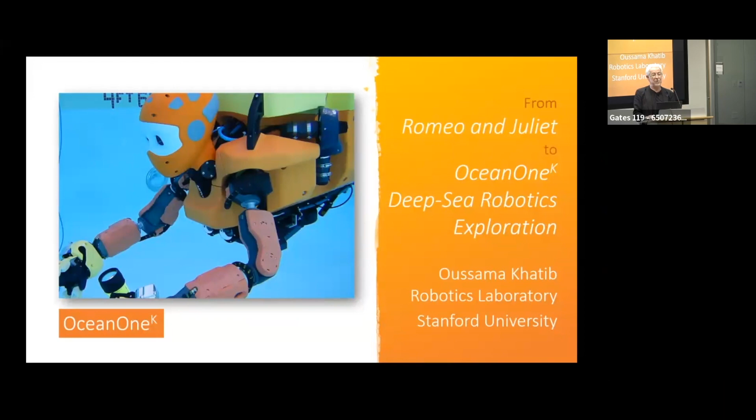But Ocean One is one of the few robots that is going to work in those extreme environments, connecting humans - those of you who have touched virtual environments. We are going to work with a robot, and when this robot touches the seabed, you are going to feel what the robot is doing. You're going to be able to help this robot. And this is what we've been doing. Last year, we ended a mission last July, and that mission was to take the robot slowly from 40 meters all the way to the bottom of the sea, where we can still operate the robot to perform tasks that require hands, require sensing, and require retrieving artifacts.

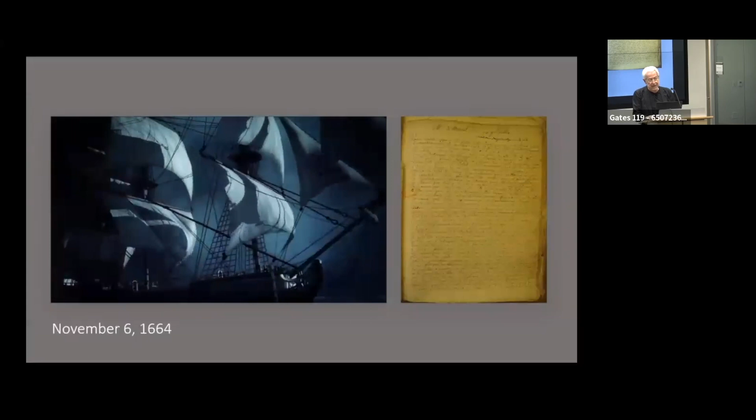So this robot comes following the original Ocean One. Ocean One was designed and deployed in 2016 to retrieve artifacts from La Lune. La Lune is a vessel of King Louis XIV that sunk off the coast of France in 1664. It is at 91 meters, but it's very difficult to reach because humans are only able to go to 50 or 60 meters. To reach this wreck, they use suits. And any normal interaction for an archaeologist with that environment is very difficult, because you need to touch, feel, and interact before removing any object.

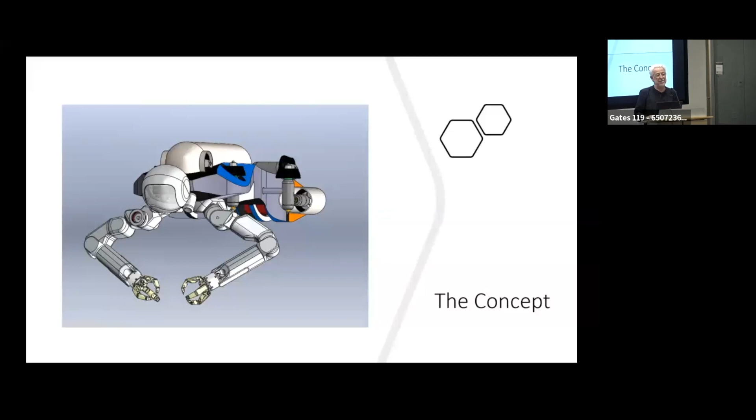So the concept of Ocean One is to create hands with sensors, and these hands are going to require arms. Now think about the problem of taking hands and arms and electronics deep in the sea. The robot has to float, and this robot was conceived with design of flotations.

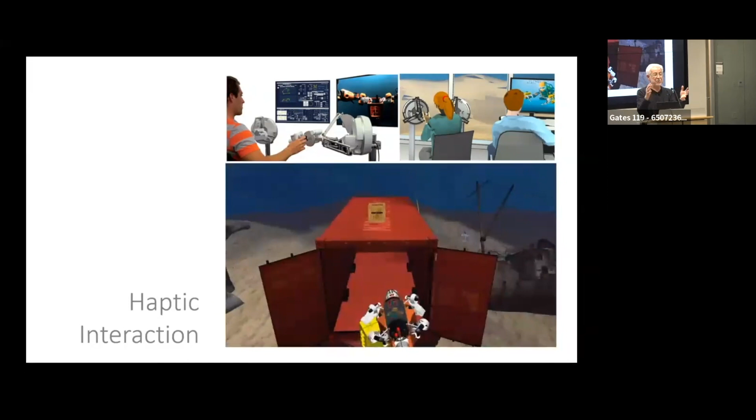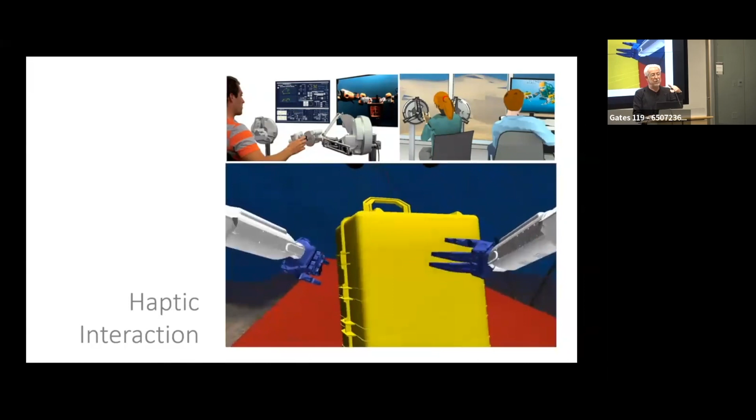For the arms, we don't want an arm that is heavy. We would like to have a gentle arm, we call it a compliant arm. So we have to come up with a solution for the pressure. You don't want to use heavy metal to protect the arm, so we created an oil-filled architecture to build the links, and through tubing we go from one link to the other so that we can have a compliant, touch-sensitive arm.

Some of you have tried this. This is one of the most popular demos where you wear your glasses, you see in stereo, and you are able to touch the simulation. The simulation is very important for developing any complex system, and this was one of the tools we used in our work. This is not an animation, this is a physical simulation with dynamics. You can see this ellipsoid changing as the robot dynamics changes as you extend the hand and move the hand.

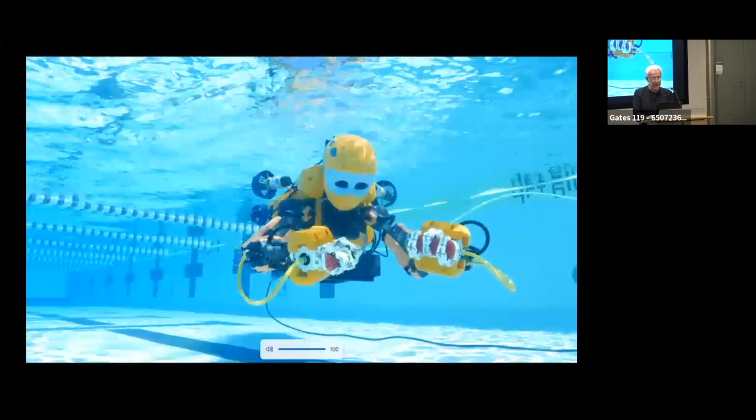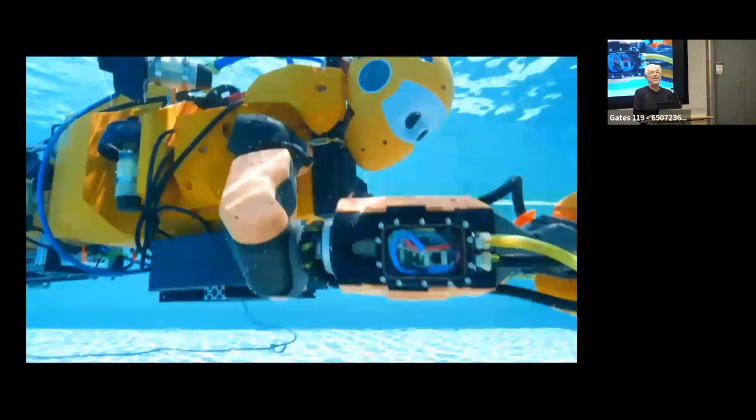Finally, this robot needed to be tested, so we took the robot to the pool. You can see the robot in the pool moving here. I'm not sure if the sound is coming out, so just maybe we can make sure we have sound from the video. Students will be sitting by the pool watching the robot or swimming with the robot. It was a lot of times taking this robot all the way to the pool and testing it, and finally the robot was ready.

We shipped it to France and were deploying the robot on the site. The robot was tested at 15 meters first, interacting with humans.

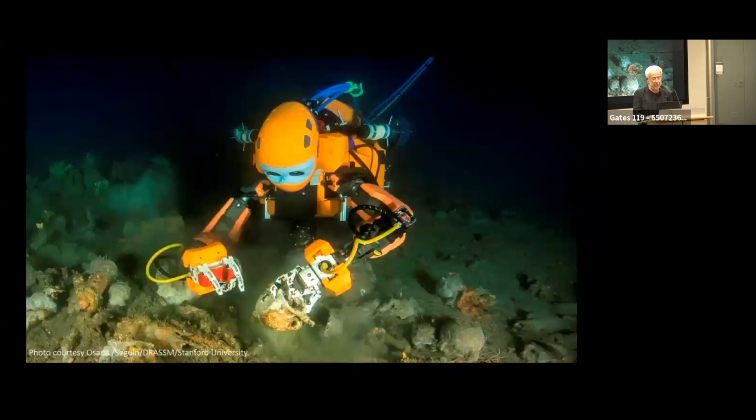So what you do is you place your artifact in a container that floats on its own, and you can see my students so happy. We recover a vase, a Catalan vase from 1664, untouched by a human, and unbroken. The archaeologists were really amazed. They said, this is amazing, a beautiful vase, you didn't scratch it, how? This is because we have dexterous hands, and the touch is so gentle that you are not smashing the artifact that you are collecting.

The year after, we took the robot to another nice place, Santorini. This is a tip to the students: make sure your robot goes to nice places, and then just follow the robot. We were working there with scientists, supporting their work. It was not about the depth, it was more about how the robot can interact and work with humans.

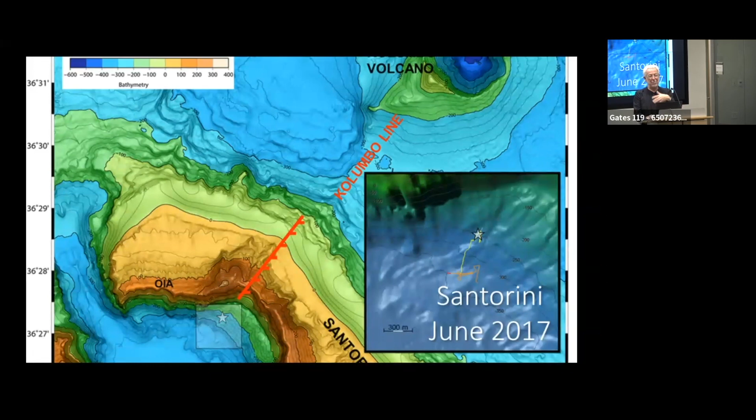We don't have too much time to talk about every expedition. I'm going to move to the question: what is the relation between Romeo and Juliet and Ocean 1K? Well, it wasn't like one day we woke up in the morning and said, okay, let's build a robot to go underwater. It was a long, long process that took us to come up with this idea and come up with the capabilities to handle pressure underwater.

In this place, actually from here, the camera is over there. You are seeing the inauguration of the Gates building. This was Bill Gates with Melinda Gates, and my students were demonstrating this robot over there. This is the Romeo. Juliet actually is at the museum now in Munich, so Romeo is alone in the lab.

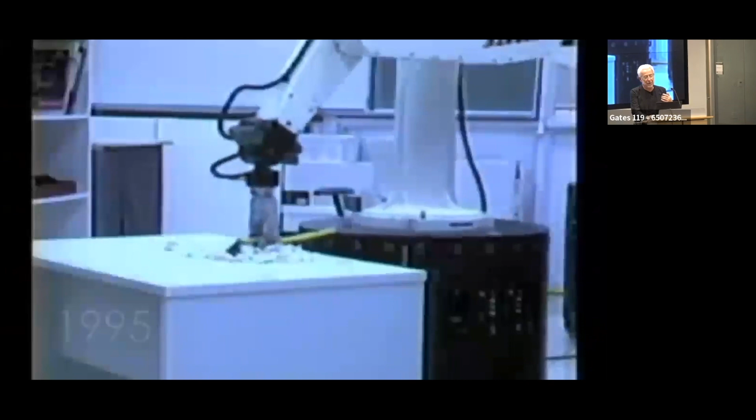This was amazing because when you think about it, it's 1995. In 1995, we were able to iron, vacuum, we were able to get robots to cooperate.

And with a very fragile case, I mean, this is amazing. Even dancing with the robot. So I will show you more a little later, but robotics has evolved so much since.

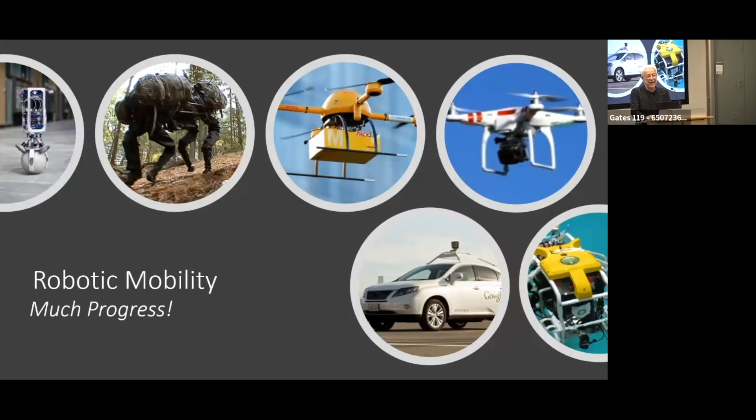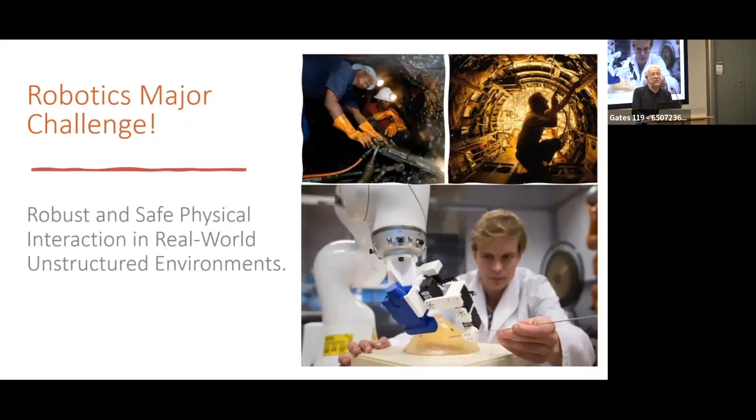And today we have so much progress in robotics. And this progress is quite amazing, especially when we think about mobility. I mean, in mobility, we see robots on land, in the air, underwater. The challenge that we have today in robotics is, can we do the same progress with physical interaction? That is, with robots that are able to interact with the physical world and not only see and move in the free space. So just think about a task like this, cleaning solar panels.

This is very difficult because you cannot anymore pre-program the robot as we did before, inspired by the assembly line. With the assembly line, we automated the process where we design fixtures and jigs and make sure that everything is capable of going over and over pre-programmed. Well, now we are talking about robotics in the real world, unstructured environment. And if we cannot program these robots, how are these robots going to be deployed and operate in real time?

Well, humans do it. And humans are very different from the robots we use in manufacturing. In manufacturing, we use very heavy, bulky robots because we wanted precision. Humans are not precise. So the only way we can do that is if we come to an abstraction of the way we program robots, if we can bring human skills to these robots and ask the robots to perform high-level tasks.

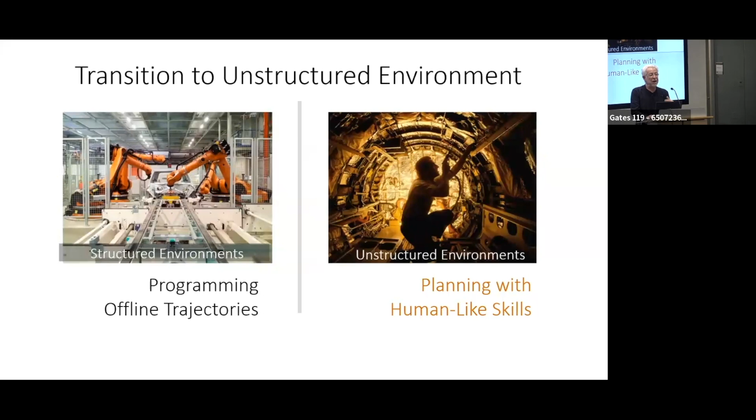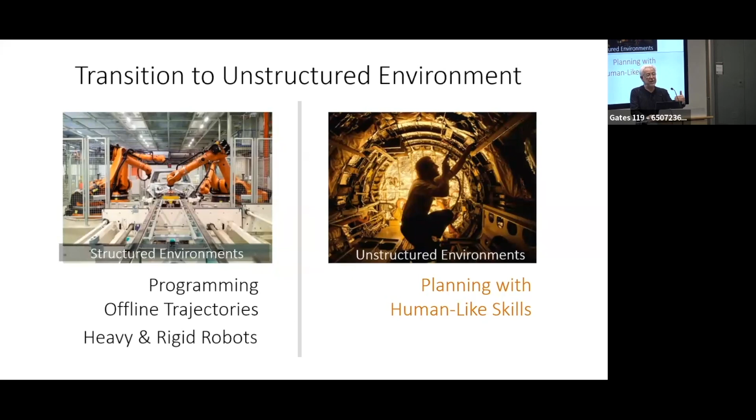We don't need heavy and rigid robots, but we need what humans use, which is touch. We compensate for our inability to be precise with our touch and feeling the way to the task. So this is the compliant robot, and you can see here an example of a compliant robot. There is no trajectory. The robot is feeling the contact. The reaction forces are guiding the robot in the proper direction to achieve face-to-face between two objects.

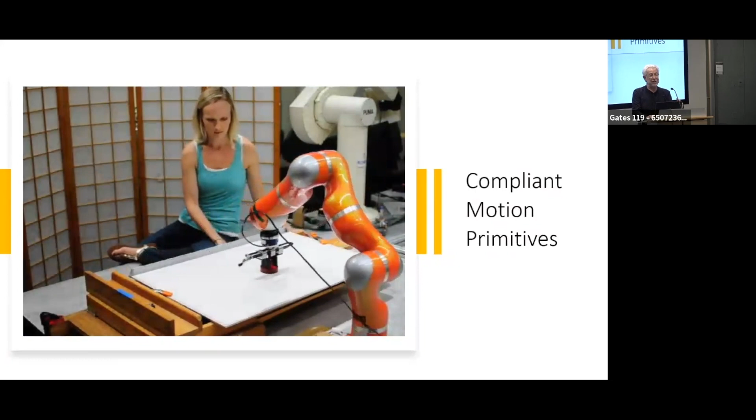This works also in dynamics. The environment can be moving, and the environment is going to change the direction of the reaction force, and the robot continues to implement a strategy to achieve this goal. So this is something very important, human skills, understanding human skills and trying to build manipulation skills.

And the human is an amazing model for us to learn from. But the way we try to learn is really a model that is relying on understanding what is going on, not just going and recording trajectory and trying to interpolate between these trajectories. What we would like to see is what was going on in terms of the strategy, the human strategy. So objects can be defined with a frame.

And if we take the data after segmentation and project it on those frames, we can understand what was the compliant frame, and we can describe what the strategy was for this task, and encode the strategy to the robot, and then implement it on the robot.

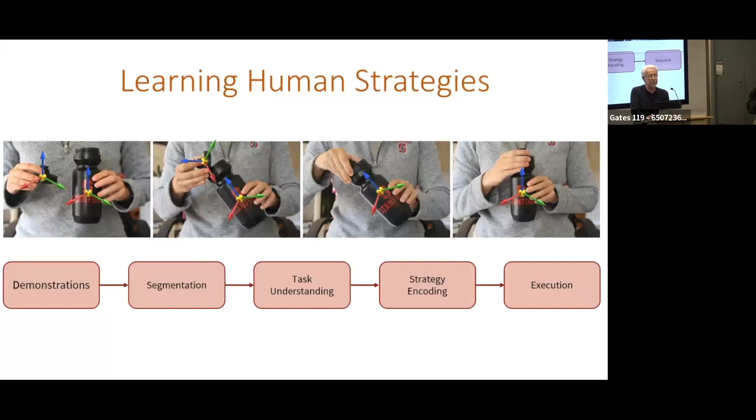So here is an example. The same haptic device is controlling a robot to perform this task. And as the robot is learning the task, now the robot can reproduce the task with the strategy.

This is implemented in many different ways. This is a model of the 787 wing, and you are placing this piece at this location through a strategy involving compliant motion. You disturb the robot, and the robot will find its way autonomously, because it is relying not on the trajectories, but on the strategy of compliance.

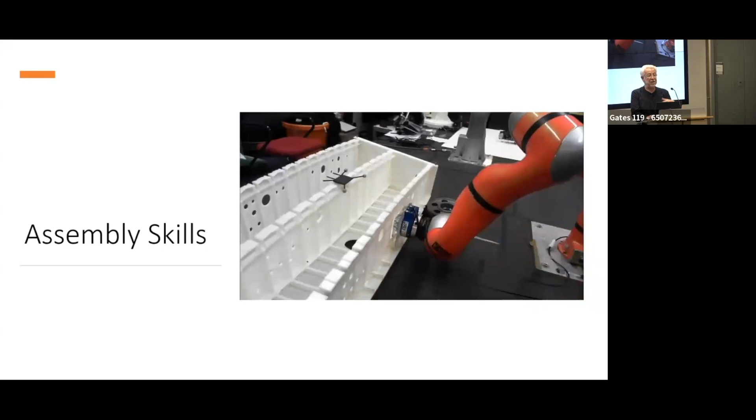You can teach robots to do all kinds of tasks, including the fact that you also need to teach robots how to use two hands. In manufacturing, we use one hand because we have fixtures. If you place your arm behind your back and try to move it and work in the real world, it's very difficult.

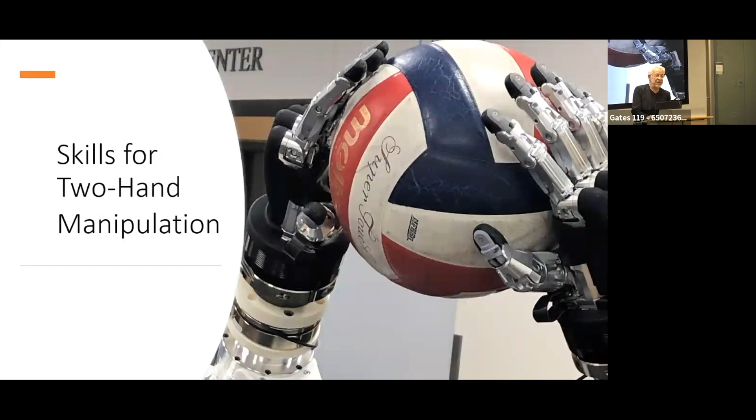So the other thing about those architectures that we use, these are not only relying on one loop feedback between perception and action. We need to deal with the frequency requirement of the system. Mechanical systems require high bandwidth feedback, and that is, the lowest level should be controlled at very high frequency.

But we don't need the same frequency to understand the features of the objects we're working with. The input to that level is going to be much slower. And as we move up in that hierarchy, we are going to have a multi-layer system that is answering the requirement in frequency to achieve functional autonomy.

We still don't have the cognitive autonomy, and we are going to rely on the interface so that we bring to the human an interface where the human can talk with the robot through speech or through haptic interaction or through programming to perform a task.

A very important tool, as I mentioned earlier, is physical simulation. We saw how we can simulate a complex robot. This physical simulation is very important also because it requires us to think about the contact.

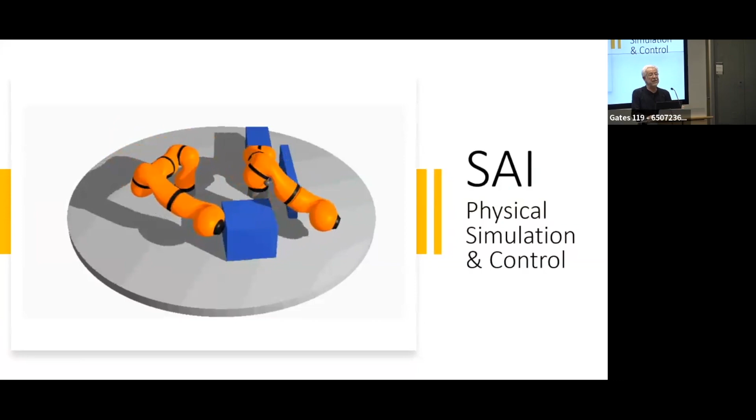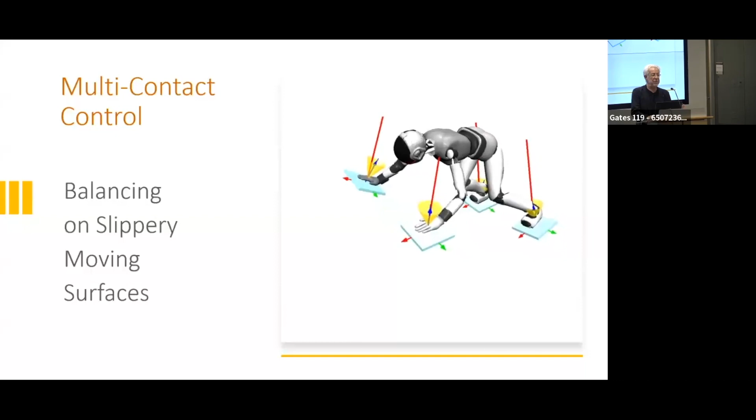Simulating contact is very difficult. Simulating multi-contact is even more difficult. You see these reaction forces, the red flashes that are coming out from the contact. If any of them would go outside of the cone of friction that you see, we're going to fall. That means the robot has to apply different forces as the environment is changing, and this is possible if we bring these physical models to the system.

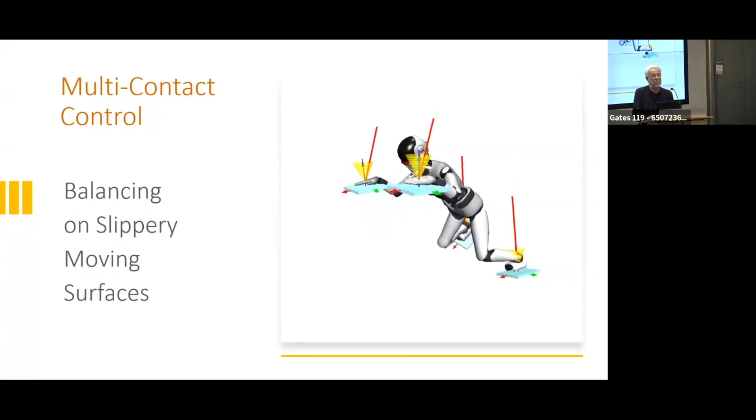Actually, this was implemented at DLR in Germany with a robot called Toro, implemented for many robots like Ocean One to perform pipelines in different tasks. Actually, this was a fantastic tool that we provided our students during COVID.

Typically, during this class called Experimental Robotics, we do real implementation on the physical robot. And this is an example of a robot fighting.

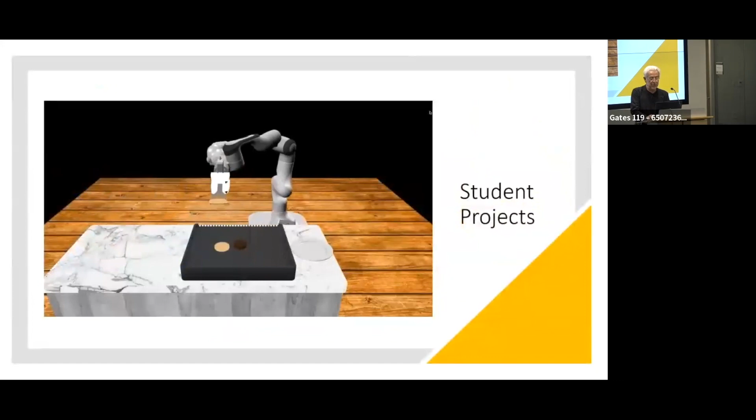And with this, we were able to get the robot to perform tasks for the student project. And the students are always hungry, so they are making projects with food. I would like to have the sound again, please, because the next segment, if we can have the sound.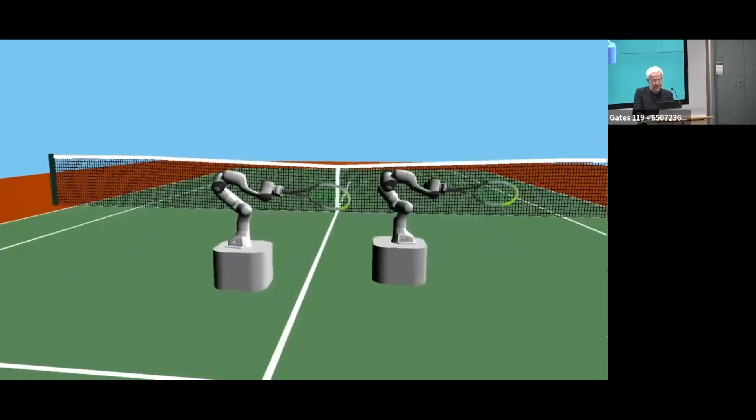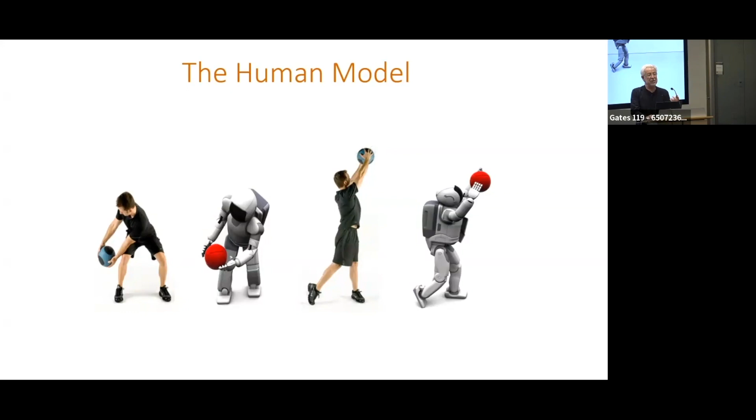So we are inspired by humans, but we also are able to take our algorithms and apply them to humans for human performance, for human recovery. And there is a huge amount of work that went into building atlases for different humans in their activities for recovery or for performance improvement.

So robotics in the field addresses many different issues, from healthcare to wellness, from assisted work to assisted living, and all these other things that are difficult to perform by humans or dangerous for humans. So this collaboration with humans can be done directly by interacting physically with the robot.

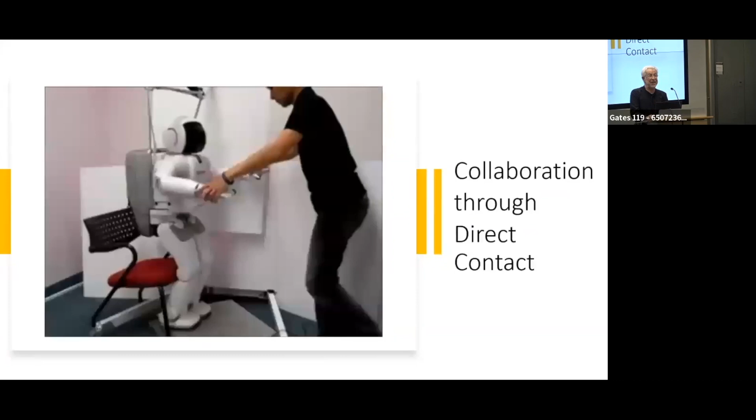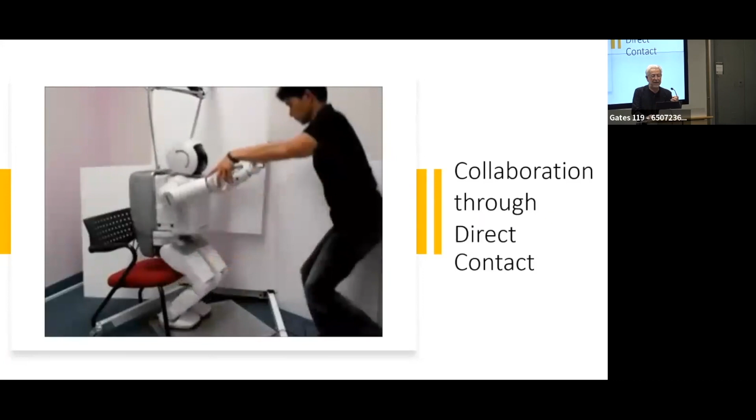Asimo was here for almost 10 years, and Asimo graduated and left with the capability of becoming capable of feeling and interacting. Actually, if you look closely at Asimo, Asimo is surprised now—what is happening to me? In the past, Asimo didn't have any feeling about any contact, and we equipped the robot with force sensing, so it feels that contact information.

Now, the contact information can be brought to the human through haptics. And there are so many applications where we can use this to save humans from exposure to danger. Like if we think about the electrical grid, do we really need the human there? Can't we place a robot there and then reconnect the human to perform and assist the robot with the task?

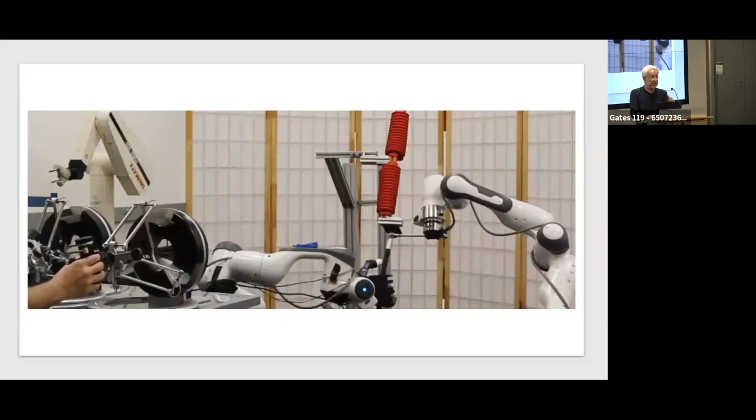This is an example of removing a cable, and you can see the robot performing this with its own force sensors, and the human is providing corrections when needed. You can do it in the air, you can do it in the ICU. In the ICU this was really a challenging problem.

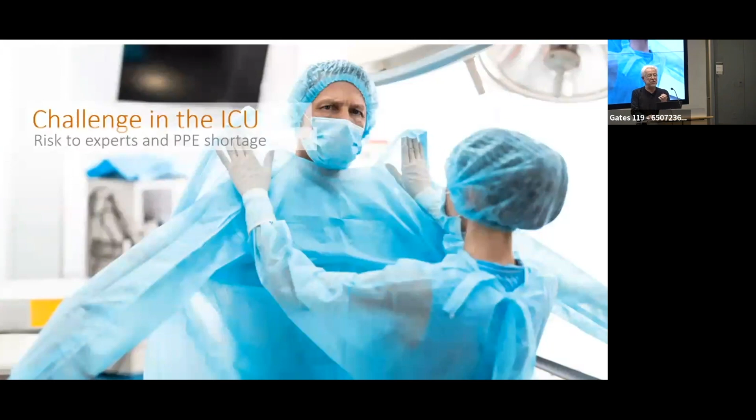I mean, just to do the simplest procedure, you need to wear all this gear, but we can place a simple, safe robot connected haptically to a physician, and now we remove the physician physically, but we reconnect the physician's abilities to perform this task.

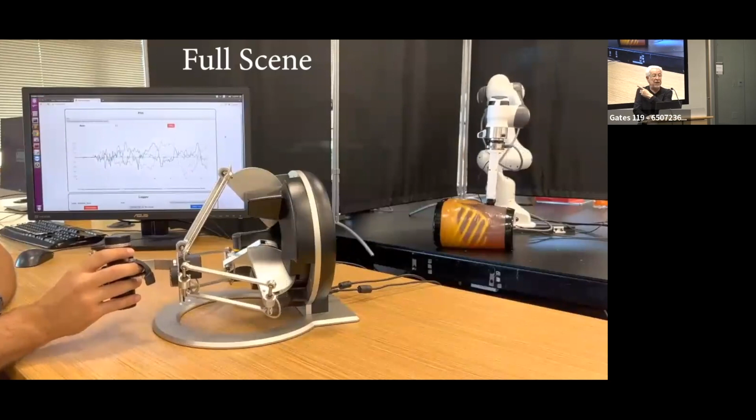Actually, I'm going to show you this live now. We're going to look at another application with ultrasound, and I see Adrian is standing up. We're going to go to the lab first, and we're going to control a robot over there using a haptic device like here. And we are going to be able to see live the display, the imaging, ultrasonic imaging from the robot.

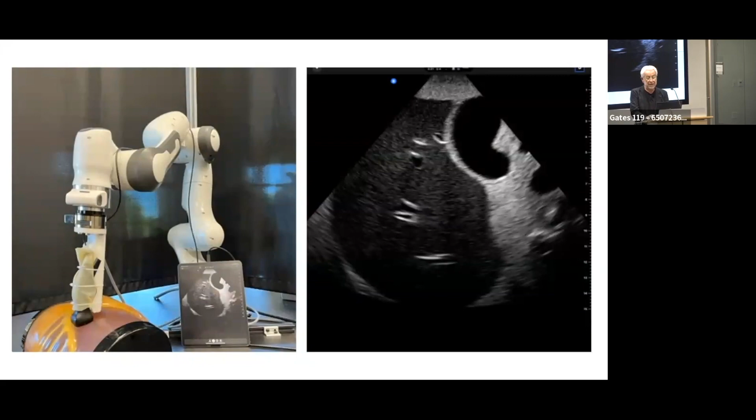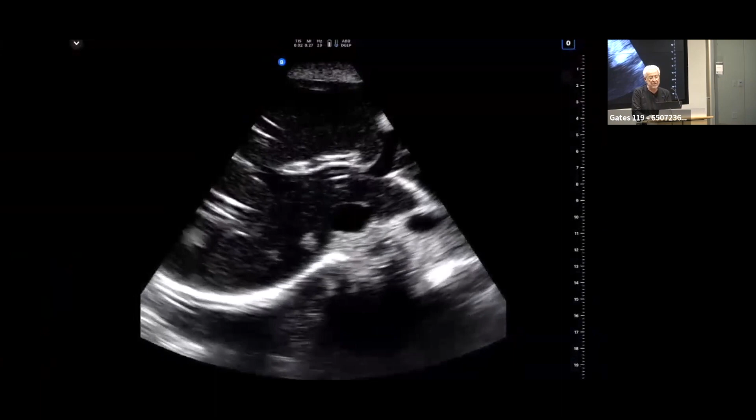This was centered over the right portal vein, which is our anatomic landmark. You can see it right there in front of the inferior vena cava. The right portal vein divides into an anterior branch, and if I angle more we see a posterior branch—so there's the right portal vein dividing into anterior and posterior branches. I'm just going to extend my scan more inferiorly to look at the more caudal segments of the right lobe of the liver. And now I'm coming into the gallbladder. You ready? Oh wow, it's moving.

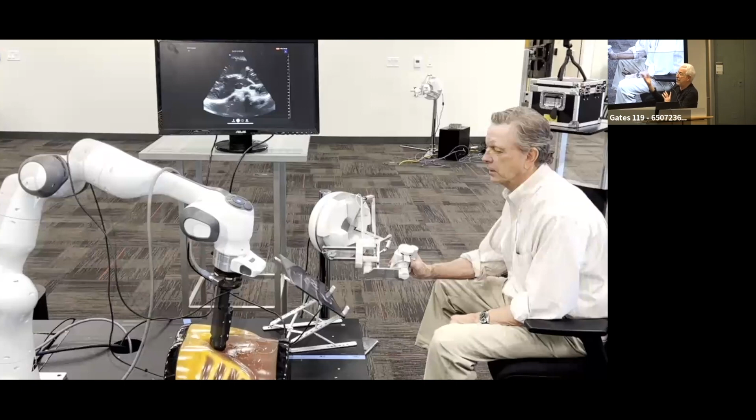So Adrian, who's a very smart PhD student, is now performing radiology. Adrian doesn't have the microphone, but essentially he is working with this phantom, and the phantom has different organs. Which organ are we looking at here?

That's what I thought. So what are you looking for when you look at an organ? Adrian, right, yeah. So just stop here. You can see this high density image, and that tells you there is a problem.

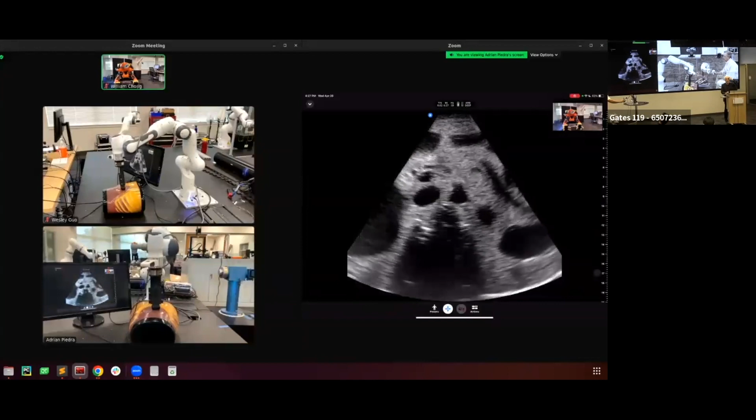So the idea is now we are controlling the robot remotely. Adrian could be in New York controlling a robot in a different city on the West Coast. And that means now we can think about distance medicine, where in many small towns there are no hospitals, but we can very quickly deploy testing facilities with a technician, and then when needed reconnect to a hospital, and the doctor can perform a deeper test and look at what is going on when we detect any anomaly. So thank you very much, Adrian.

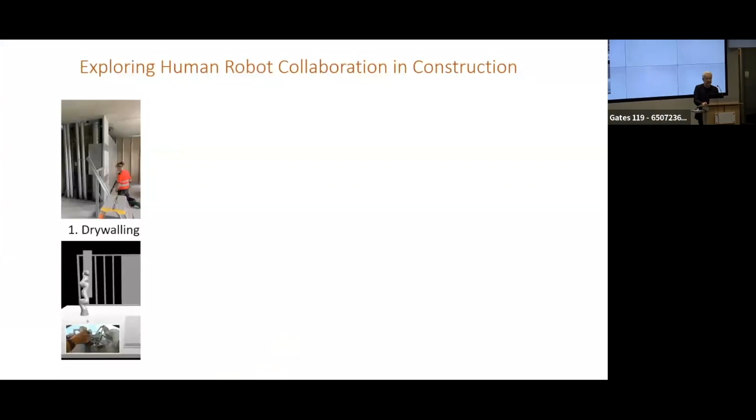Another application is in construction. There are so many applications you would like to automate, you would like to use robot force. Over several years, we've been collaborating with civil engineering, looking at drywalling, painting, bolting. And in every area, we had a project, either a class project that ended up becoming a research project. All of these different projects are quite interesting to explore how we bring robots to those challenging areas.

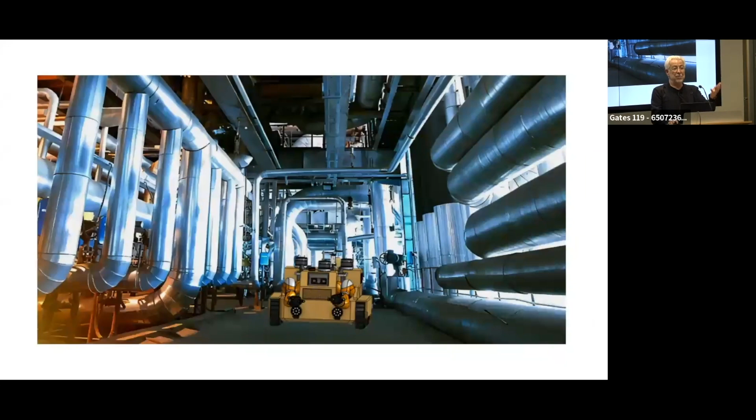Now, offshore robotics is another important area. On offshore, we have humans doing very simple tasks, and those tasks involve opening a valve, closing a valve, doing a measurement. We can deploy a robot to do this, and we can place humans onshore to help this robot perform those tasks.

We can use the robot for many things, including art, painting, sculptures. And there are many projects around how we use haptics, interacting with the physical environment to perform many challenging tasks.

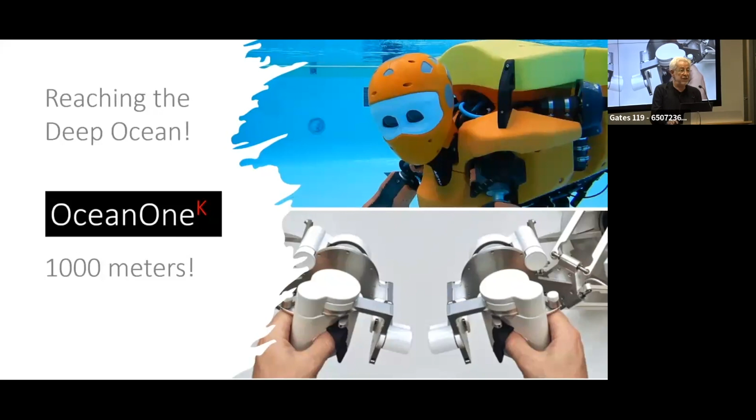OceanOneK was a big challenge for us. We wanted to go really to the deep sea. So going from the first robot that managed to go to 91 meters, to go to 1,000 meters, means we have to make sure that the flotation is not going to collapse.

At 1,000 meters, you have 100 times the atmospheric pressure. With these flotations, you're going to basically increase the density, which means you're going to increase the weight, which means you're going to increase the volume to float, and maybe it will not fit in this room. It would be really, really difficult.

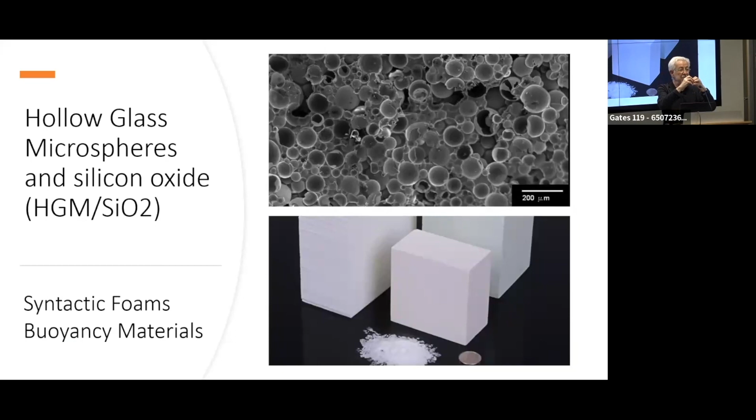So what is helping robotics is the convergence of technologies in computing and in material. In material, we have found new kinds of syntactic foams, which are essentially hollow microspheres that are very light and very strong when under pressure.

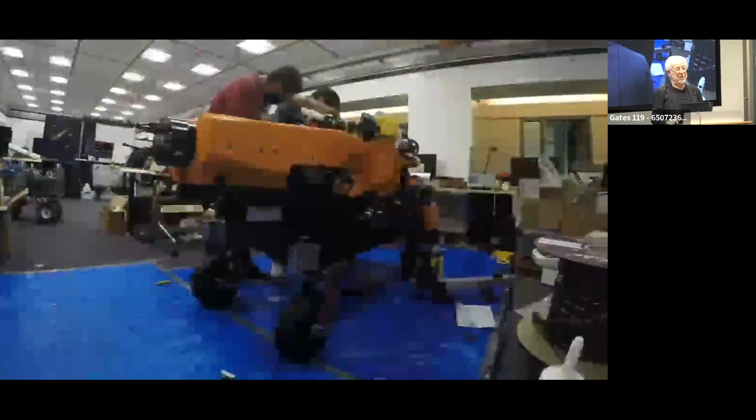Actually the robot was—this was during COVID, and we were assembling the robot to get it ready for the expedition that took us to the Mediterranean, Marseille, and Corsica, in collaboration with our colleague at DRASSM from the Department of Archaeology at the Ministry of Culture.

First, we wanted to go 40 meters and go deeper and deeper. We went to the Lightning. The Lightning was one of the combat aircraft during World War II, flown by Saint-Exupéry.

Then we went to another location deeper, Le Protée submarine. And 2,000 years ago, there was a Roman boat at Aleria at 334 meters. This boat has completely disappeared, but all the cargo is still there.

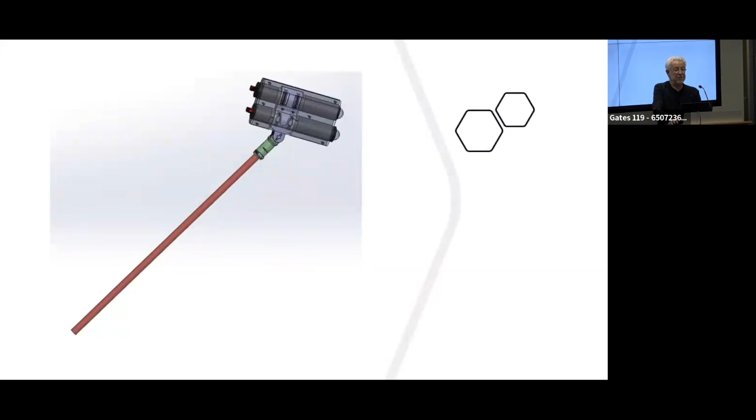The robot was training. The robot was learning how to use tools to do scanning, to make videos inside structures that are difficult to access by the robot. So the robot is now able to manipulate a camera, and this camera is usable. The robot is also interactive, supporting humans.

And here we came to our location where the boat was waiting for us, to La Ciotat. La Ciotat is a small town near Marseille. Anyone knows La Ciotat? Not Adrian.

Adrian knows La Ciotat because of this. You remember Eden? For those of you who like cinema, the first movie theater was here at La Ciotat. Les Frères Lumière came to La Ciotat to film, and this was the projector in the cinema that's still standing. If you go to Marseille, don't miss La Ciotat.

This is our boat waiting for us at La Ciotat, l'Alfred Merlin. Our robot arrived on the boat, and here we have the robot installed on Alfred Merlin. Alfred Merlin was a new boat for the Ministry of Culture.

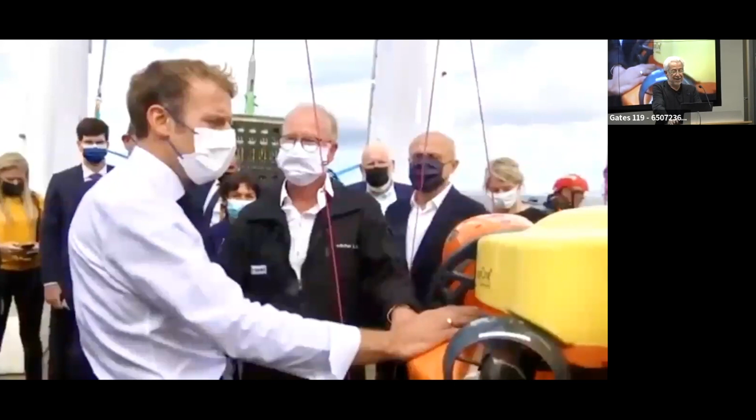Look who came to visit - the President. Macron was there, and he was really very interested in the haptic interaction with this robot.

A few days later, my students arrived, and we were ready for the big dive. To dive, you have to realize you're going for 7 hours in the water. So you need a lot of support with cables, and you need power. You need to film, so there are a number of ROVs that are moving with you. This is the control room.

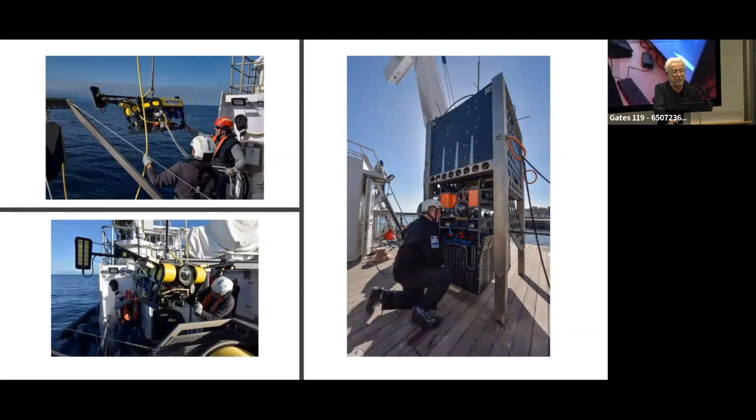And we went to the Lightning. We went to Le Protée, and then to Corsica and Aleria there. Aleria is just an amazing location.

Here is one short view of the robot going to bring a cup. Here is the cup - the archaeologists were so happy we were able to bring a cup without breaking it. This is so fragile. It was studied, they had it in images, but never got their hands on it.

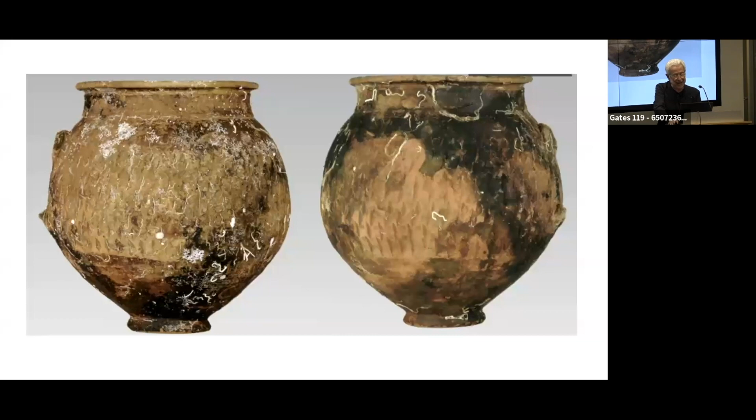And we brought all kinds of artifacts, including oil lamps. The oil lamps decorated with palms, different decorations, and a lot of shrimps came with the robot.

So then we went to the Crispi, and for the Crispi, the first task is we place a marker, and once you place the marker, then you can go and scan, and then you can have a 3D reconstruction of the actual boat, and then you can go around it. We will see the expedition on the Crispi just in a moment.

After that, we went back to the coast, specifically to Cannes, and we went with the camera to film inside this airplane. You can see the robot going inside with the camera and filming.

So our robot went from our record of 500 meters for the Crispi to 750 meters, and kept going, carrying a message that says 'robot first touch of the deep sea floor, a vast new world for human to explore.' And I said, we won the Palme d'Or.

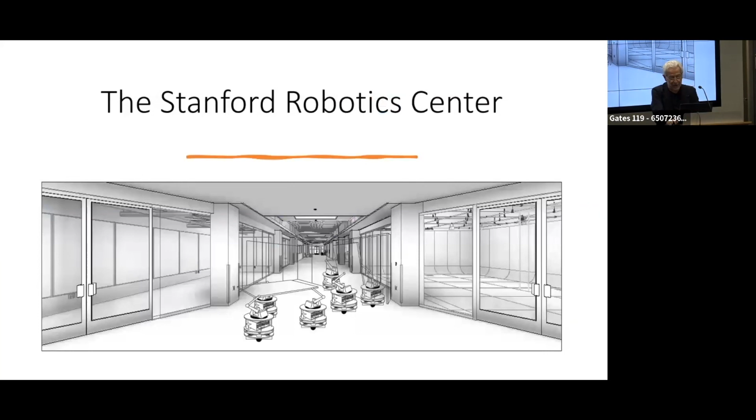This is the Stanford Robotics Center that is going to have an aquarium. This is the aquarium at the end of the center that is going to be just next door. The aquarium and this center is designed to bring faculty from all the different departments across Stanford to bring this multidisciplinarity to what is needed for challenging tasks.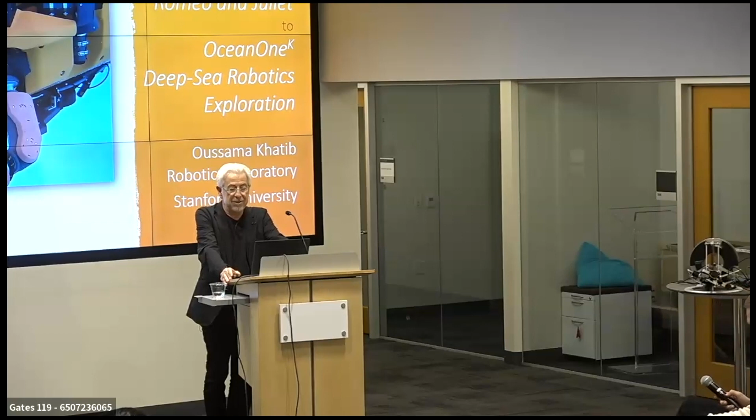Well, thank you for this question. This happened actually during the transition in manufacturing, during the revolution of manufacturing that brought robots. Basically, we created spaces where only robots are working without humans, and robots and humans were separated. Working in the unstructured environment of the real world is a much more challenging problem. And you can see that in every aspect of interaction, we need the interface to connect to the expert, to connect to the specialist, who is to connect to the archaeologist, to the physician. And I don't think in those applications robotics is going to replace human. It's going to bring to humans more capabilities and tools to interact and reach places that are difficult to reach.

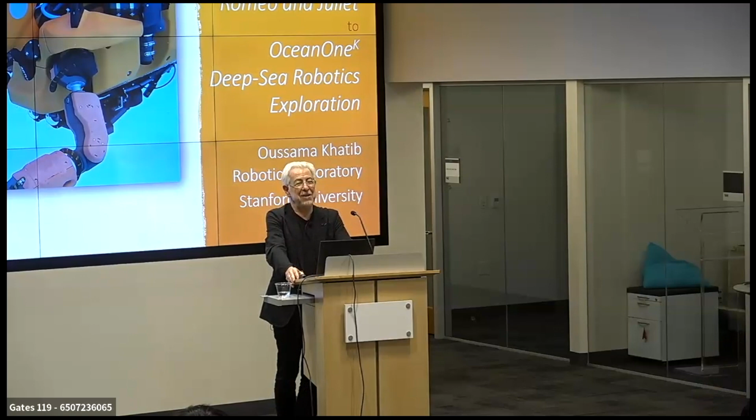Right now, 70% of our planet, which is covered by water, is unknown. And we have so many challenges with the environment. How can we understand the oceans without tools to go there? And it is not about just looking and seeing with cameras. It's about doing, maintaining structures. So many things in different areas that are very difficult and challenging are going to require human intervention. So we hope that this is the direction that robotics will take.

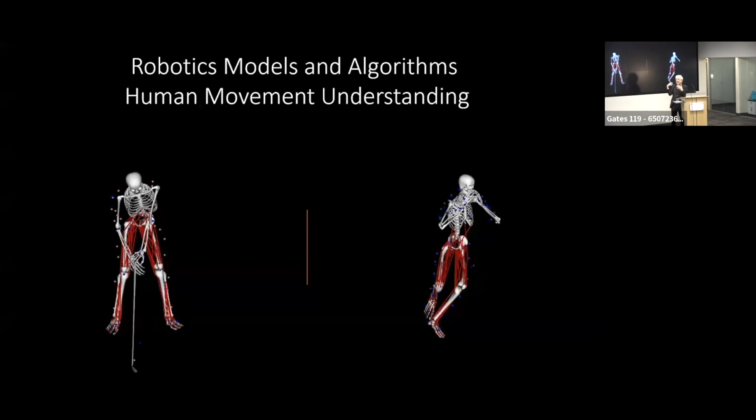This is the only robot in the world that is capable today to go to the depth and retrieve things and repair and fix things. But we are working on many other robots, and we need many different robots. And when this robot goes to the bottom of the sea, it's going with many other robots designed very simply for vision or for monitoring the configuration of the robot. So yeah, this is robotics. It's very, very diverse.

So I mean, for handicap already there is so much. Oh, you're golfing. Well, I really can help you. I mean, this is amazing. This is telling you what the line of acceleration is, and you can watch yourself playing, and you see the corrections as you're playing, and you could train in the simulator first. So we are open 7 days a week.

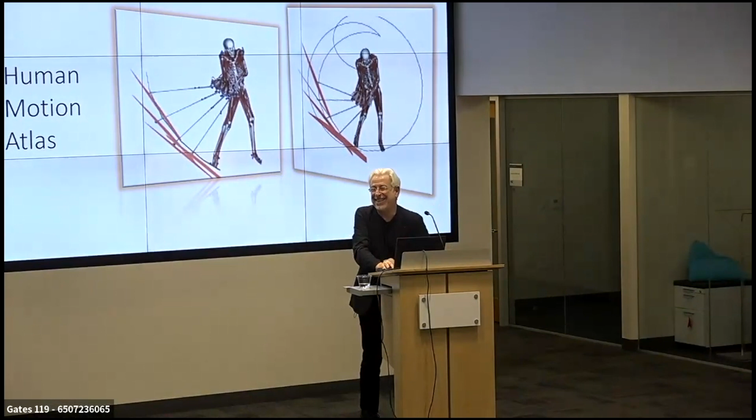Yeah, you had the follow up. Have you, how far are you from removing the cables for cave diving and stuff like that? Because what's also interesting is communication wise underwater, it's more difficult.

Exactly, this is one of the big challenges with underwater robotics. You need a cable because you need the power. We actually moved this robot in the pool with a battery, and the robot can move alone, you don't need to interact with it. If you have localization and SLAM, you can do that. We did it here, but the battery lasts for 40 minutes, so we couldn't even test the robot fully. So the power is one problem.

Then there's communication — you don't have electromagnetic signals in the water. However, we worked with our colleague at MIT on the development of optical modems, so the communication problem is solved at short distance. What's happening right now is our robot, and multiple robots, are moving, always connected to another robot at 30 meters. So the future will be: you have a cable to a station for communication and power, and you can have these free robots communicating through optical modem and recharging from that station.